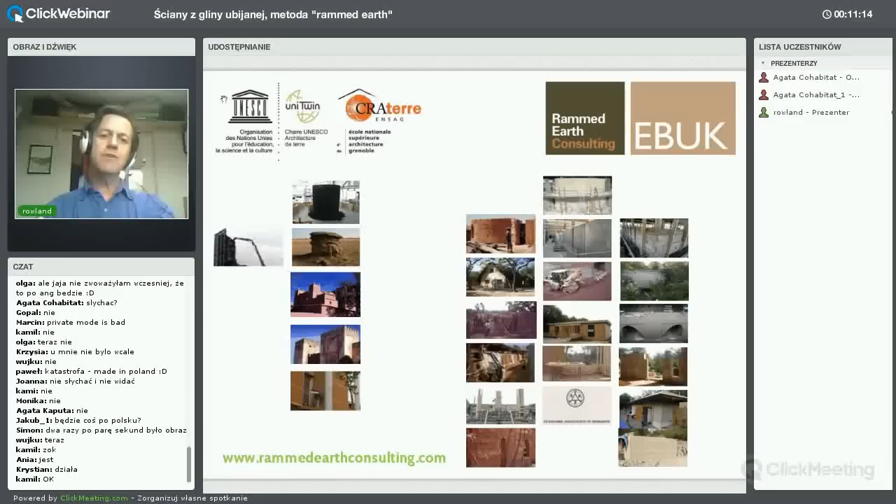Knowledge and no knowledge at the same time. I'm going to just start off with a slide about

What rammed earth is not. We just started with a little film from, I think, America, and they're adding cement to their mix. Adding cement to the mix is something that we just don't do. If you need cement as a binder, then really you should be making concrete and not calling it earth, because it's just a confusion.

I'm just showing this slide because it shows the figures from the UN, which says that every ton of cement which is produced produces 1.25 tons of carbon dioxide. And there's an issue there because,

Well, these little shells are about the size of your red blood corpuscle. Inside that ring of calcium, which is the shell, there was a little piece of carbon, and that piece of carbon was taken out of the atmosphere up to 4, 6, 800 million years ago, and deposited at the bottom of the sea in a very stable form. And the way that we make cement is to burn that piece of carbon out of the shell and put it back into the atmosphere in the form of carbon dioxide.

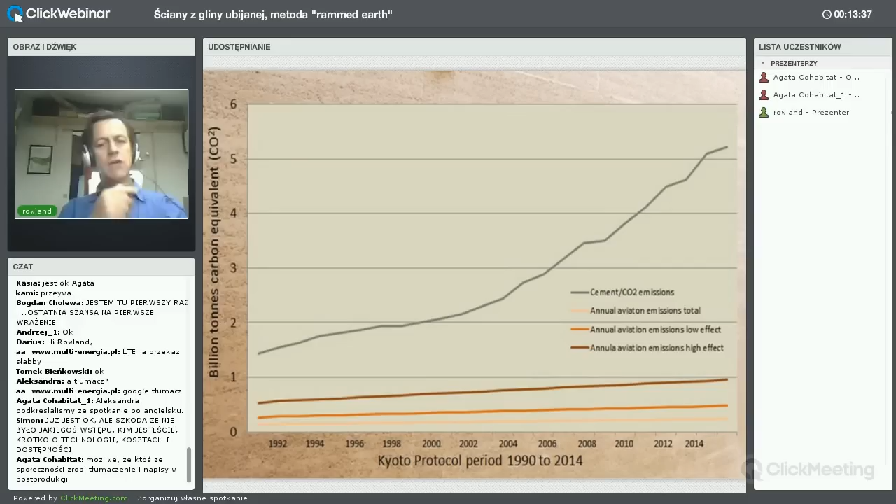We just prepared a little graph about this, which compares the carbon dioxide which is being emitted from aeroplanes with the carbon dioxide which is being emitted from cement over the Kyoto period. So from 1990 up to the latest figures we have, which is 2014. So you've got these three lines at the bottom, which is CO2 emissions from aviation, from aeroplanes over that period, and the grey line above is the CO2 emissions that we have from cement over the same period.

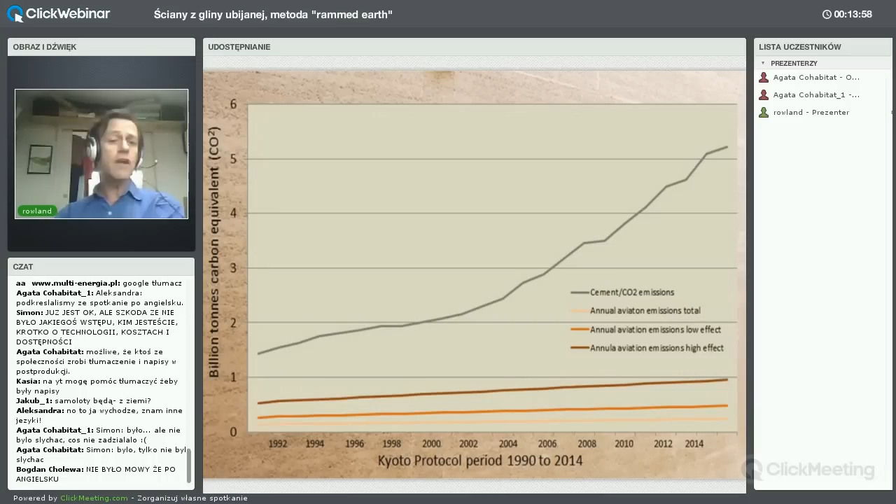And you can see that the emissions from cement are rising very, very fast, and much faster than they are from aviation. So this is one of the reasons that we don't use cement in our mixes, and one of the messages that I'm most keen to promote about this material is that although in America and Australia a lot of people use cement, we do not.

The next slide just kind of emphasizes this point a little bit more, talking about monopolies and why it's not so easy to build with earth in a modern context, and this will be as true in Poland as it is in the UK.

Legislated monopolies, building regulations, standards tend to focus on materials like cement and steel, and they in turn lead to financial monopolies. They will lend you money, will insure your building as long as you follow the building regulations, which is about cement and steel. And then professional monopolies will train you to be an architect or an engineer, but obviously we're going to train you to follow the building regulations, and therefore not earth, but more cement and steel.

And at the bottom you've got research monopolies, where again funding from government and industry tends to be funded in such a way that it supports industries like cement and steel. So you have this situation, and our job is to try and work out how to get around some of these things and move earth to being a more normal type of material.

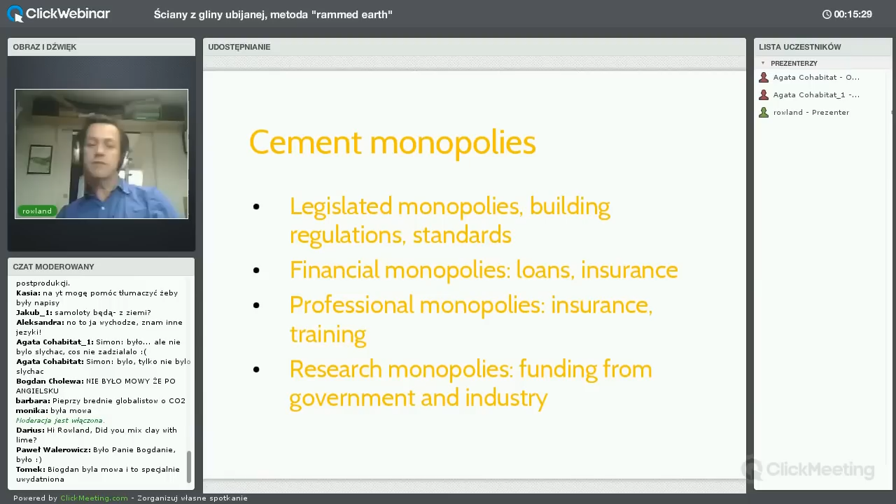Okay, so that's the heavy stuff. And then the next question that quite often comes is why earth? What is, apart from these emission issues, what else can earth offer?

So this is an image of a termite mound in West Africa, and it's in an area where the temperature can go from 40 degrees Celsius in the day to 0 degrees at night. And it's sheltering organisms which are very sensitive to temperature, and they're using only the materials around them which they have to make a stable environment, and the material that they're using is earth.

And with the earth and the way that they're designing, they're able to stabilize their environment to such an extent that they have a very low temperature range inside, which I can illustrate to you a little bit more what the inside of this structure is like. The white areas have been filled with plaster of Paris, so they are air, and they're surrounded by this clay structure.

Within that structure, the termites farm a kind of fungus, and the fungus is extremely sensitive to both temperature and humidity. If the fungus dies, then the termites die, because this is their food source. So they found that using earth is a very effective way of controlling both temperature and humidity in an area where the temperature diverges by 40 degrees in a 24-hour cycle.

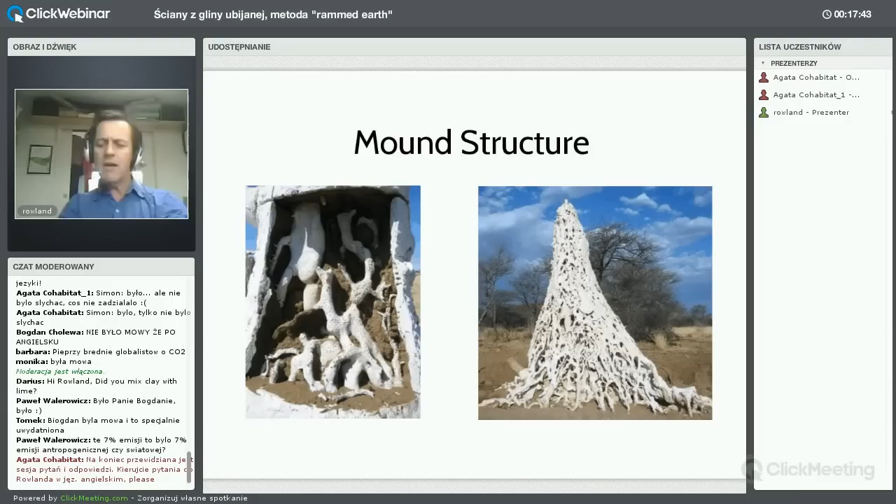So earth has got a lot going for it in terms of how you use it and the kinds of environments you can build with it. Termites have been doing this for 400 million years, and they're extremely advanced. We've been doing it for a few thousand years, and we have a lot to learn. For me, that's part of the excitement of using the material.

Rammed earth is just one of a family of earthen materials. It's one of the denser earth materials, and it's been used around the world, on every continent except Antarctica. There are a whole set of common features to do with the use of the material.

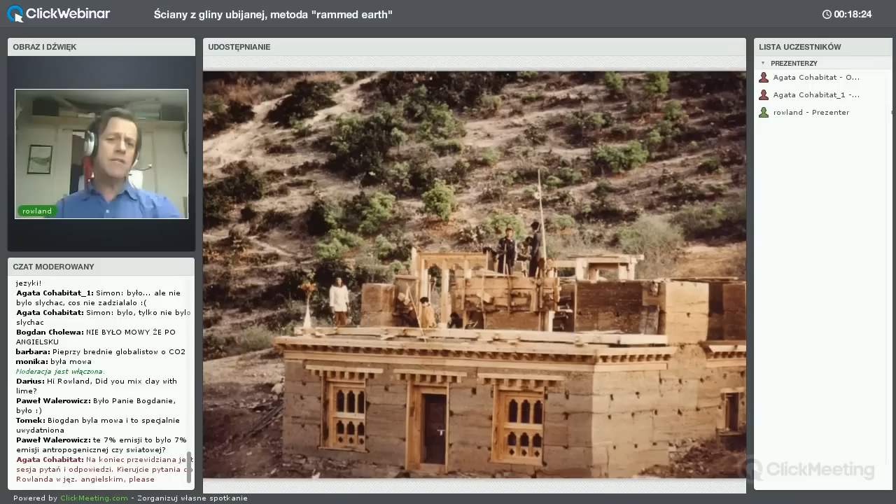Things like not moving material very far. In this case, this is a building in Bhutan where the building is on the side of a mountain, and the material has been dug from where the building stands.

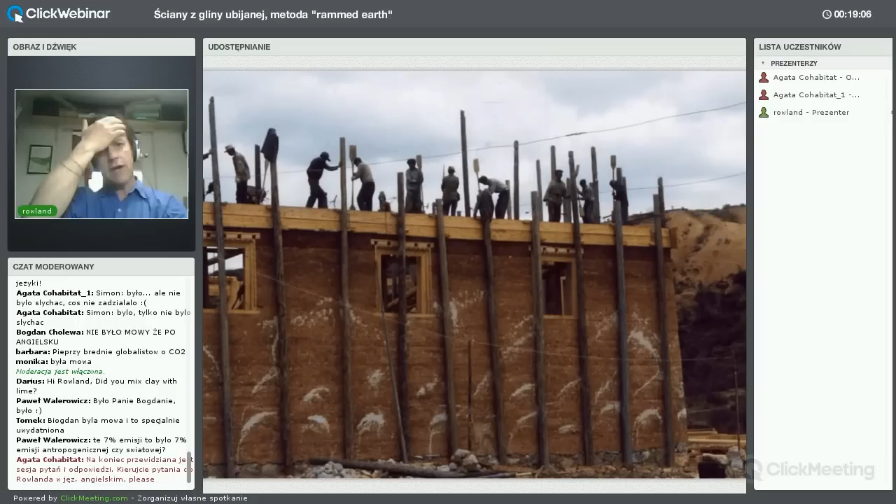We've been in a situation in West Africa where the opposite is true, and women do all the ramming while the men do all the material preparation and placing. It doesn't really matter, as long as the correct conditions for the material are met.

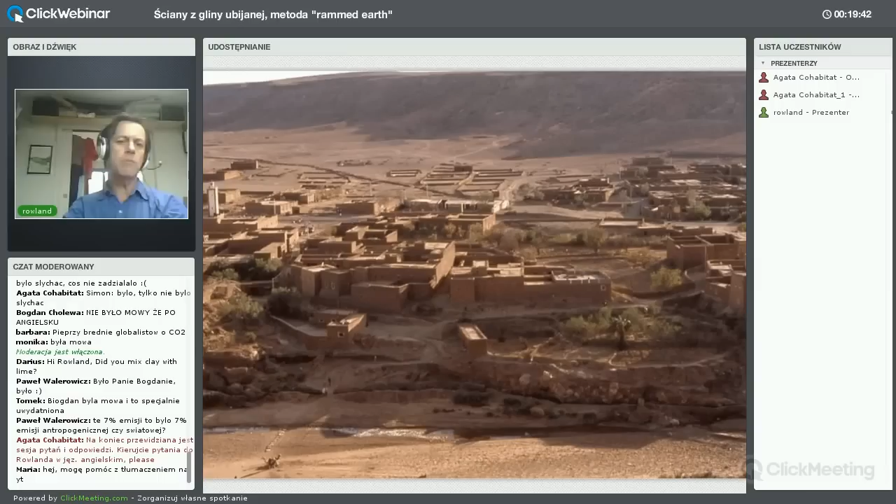This is Morocco, and Morocco has an enormous quantity of rammed earth structures. We're looking in this image to a new town from the site of an old town. The old town has 3 or 4 story buildings, while the new town has 1 or 2 story buildings, respecting the newer building codes.

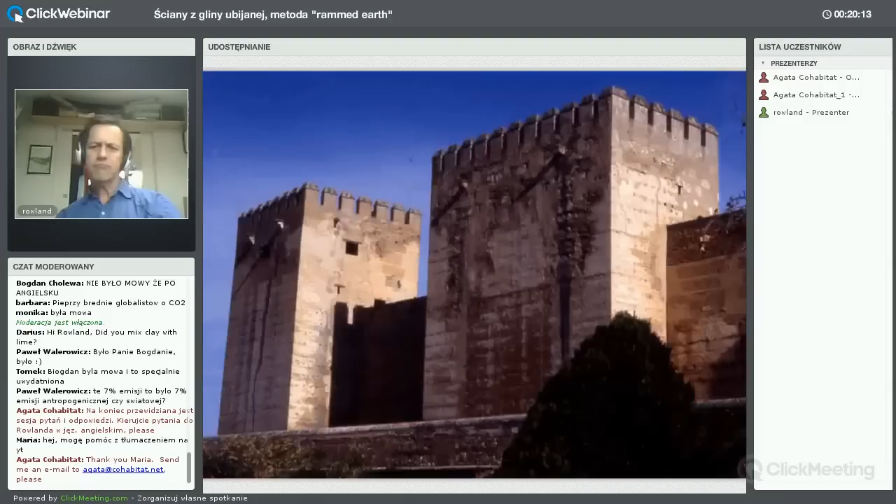Historically, there are a lot of amazing examples. This is in Granada, Spain — the Alhambra. But of course, the Great Wall of China was also very largely rammed earth. Some parts of it have brick or stone facings, which is an aspect of building with rammed earth that has been used many times across the centuries and in different places — that it can be plastered or finished in lots of different ways.

It goes through different fashions. People want to see the earth and think it's modern and interesting, or they don't want to see the earth because it's old-fashioned and poor. Really, throughout all of these things — whether it's rammed by men or women, in China or Peru, covered or not covered — the same aspects of the earth remain: if you do it correctly, you can do all of these things.

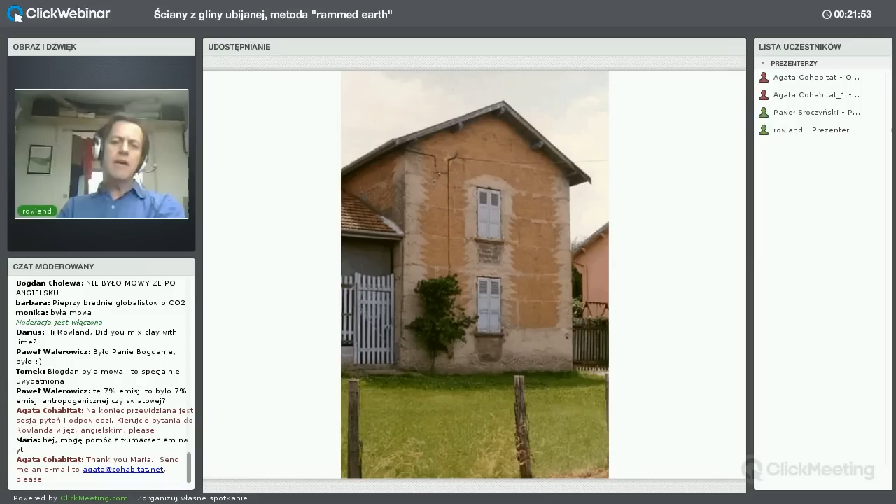There's a big history of earth building, obviously, wherever humans have been. Typically, humans live where there is soil, and soil can be used in lots of different ways. This is central France.

I don't have images from Poland, but I know of interesting work done by a woman called Marta Zurakowska, who was studying in Scotland. She gave a paper about earth building after the Second World War, which was supported by the Polish government and universities, but fell out of favor in the 1960s. She says Polish building standards from the 1960s contain all the essential information about earth walls, plasters, and mortars, but they're now forgotten. I guess if you dig a little in Poland, you'll find more of this kind of information.

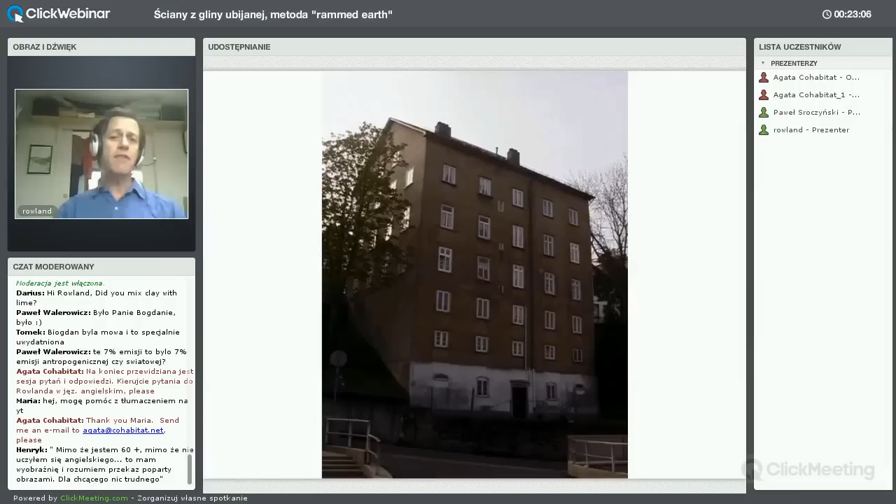One question we're very often asked: how high can you go? This is a German example from the former East Germany, built in 1820. It's 7 stories, built from material dug out of the basement to form a cellar. It's not very attractive or beautiful - one feels architects today could make something more interesting to look at - but nevertheless it's been there for coming up on 200 years, and it answers this question about how high you can go.

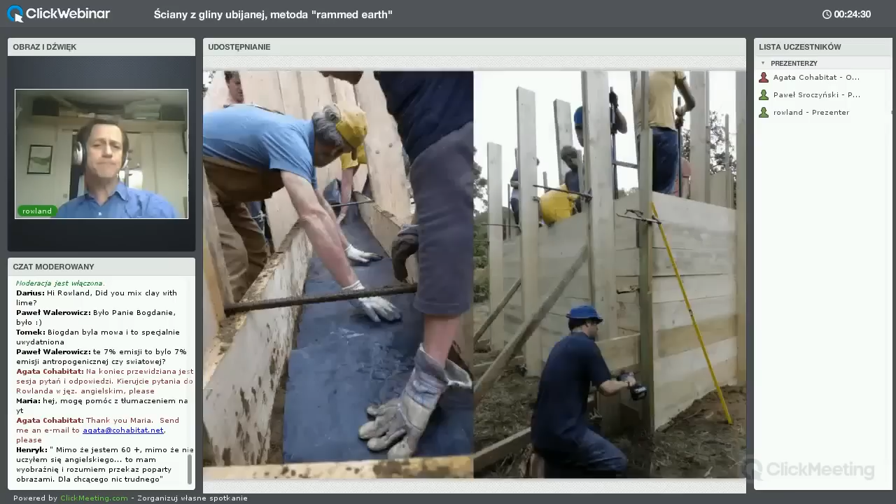So, rammed earth. I'm going to move around different projects and talk about different aspects, but just quickly to say there is no one answer to what formwork and what material you can use. It's quite widely applicable.

This particular project is a workshop, and we're using formwork made from old scaffold planks, fixed together and bolted through quite simply, using a mix of material.

This is very basic formwork using scaffold planks to make a structure about 5 meters long and 2.5 meters high, and we rammed this all by hand in about a day and a half with a group of architects.

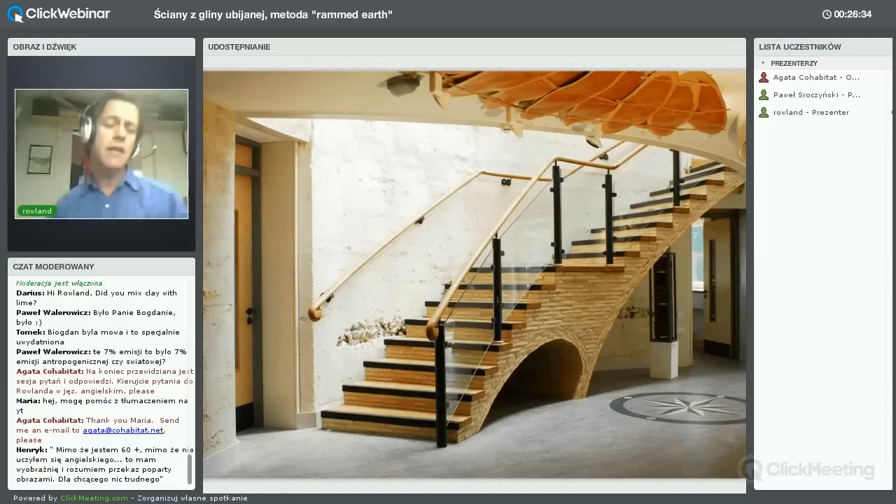Now we come to the heart of the material. First you have the box, the formwork, in this case a concrete formwork hired from the concrete industry. On the inside face, it's more of a smooth curve, and on the outside face, a series of flat faces which will have insulation put against them to meet modern building regulations.

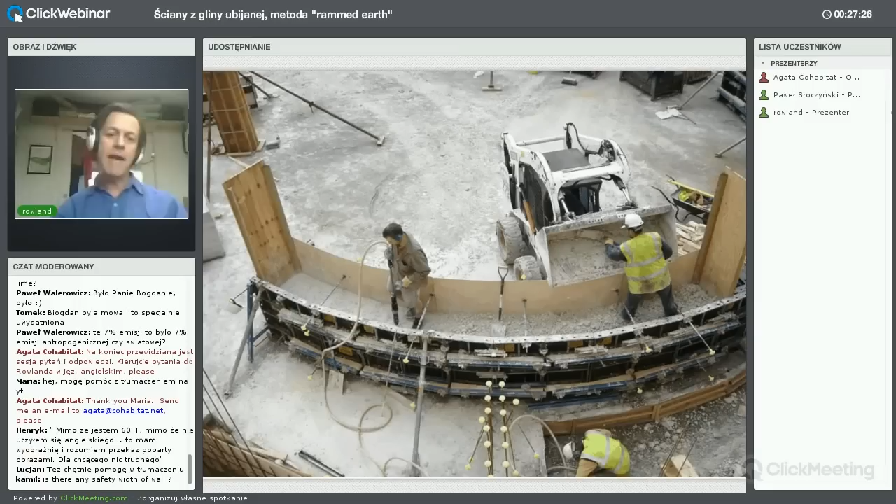Behind you can see a white earth material, that's chalk, and it's been moved from the hole that the building sits into, out of the hole, and then back into the hole again to form walls. Here you can see a front end loader, and Miguel is taking material out of the bucket and putting it against the face of the formwork, and then the rest is tipped in. On the left you can see Ben with a pneumatic tool ramming. In this job we had 5 of us working - 2 carpenters, because the curved formwork is a bit more complicated to assemble, and then 3 people running the digger and the rammer and filling.

Other things to say about this image: you can see curves being produced which are simple curves, and also complex curves in the middle there. So it's really a question of understanding the geometry of what you're trying to build and understanding the formwork that you're trying to build with. Here we're actually using commercial concrete formwork, and we're making it do something that it wasn't necessarily designed to do, but in fact it does very well.

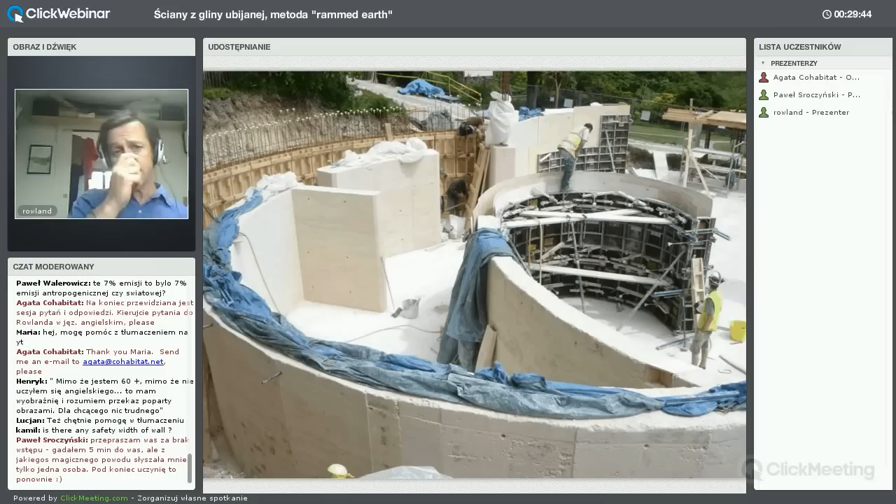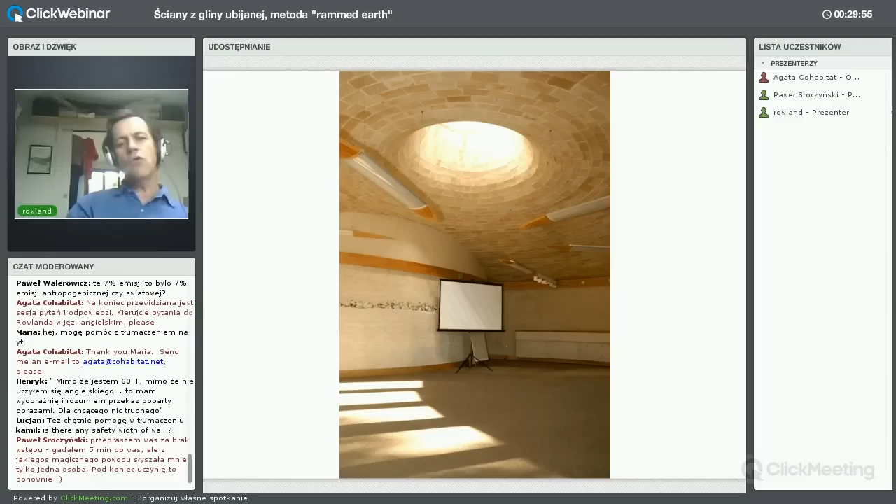Rammed earth is... you can see that in this case it's holding not only its own weight, which is considerable, about 1.7 tons to the cubic meter in the case of chalk, but it's also holding big masonry domes, and they've got earth green roofs on top of that.

Something slightly different: this is a classroom in the southeast of England, and this is a classroom built to passive house standard, passive house being an energy code. It started out as being really about insulation material and controlling the temperature inside a building through insulation. But more recently, people have started to work with mass. So on the outside, you can see wood timber cladding, and on the inside, you can see rammed earth.

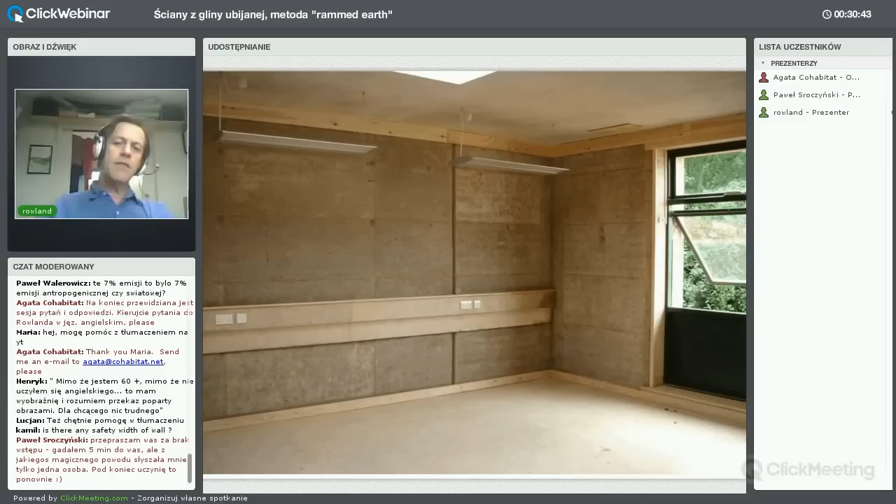And the line where the window meets the wall, you can see that there's a lot of insulation material on the outside and the mass of the wall internally. This is something relatively new for passive house, combining mass with insulation.

So any heat that's captured in the building through sunlight coming through the windows... this is a classroom, so there'll be 30 people inside, and they're hot, and they might be using computers, and they're hot. Instead of the air temperature rising, the wall temperature rises. And when they go home at the end of the day and the sun goes down, the temperature that's locked in the wall then comes out.

In fact, this is a funny building because it's one of a group of buildings that share the same heat source, and what they understood was that they should have put a control switch to that building to be able to turn off the heat coming into it, because if you have a radiator running for more than a day a week, the whole building overheats. So they actually have to turn off the heating on Monday evening and leave it off for the rest of the week.

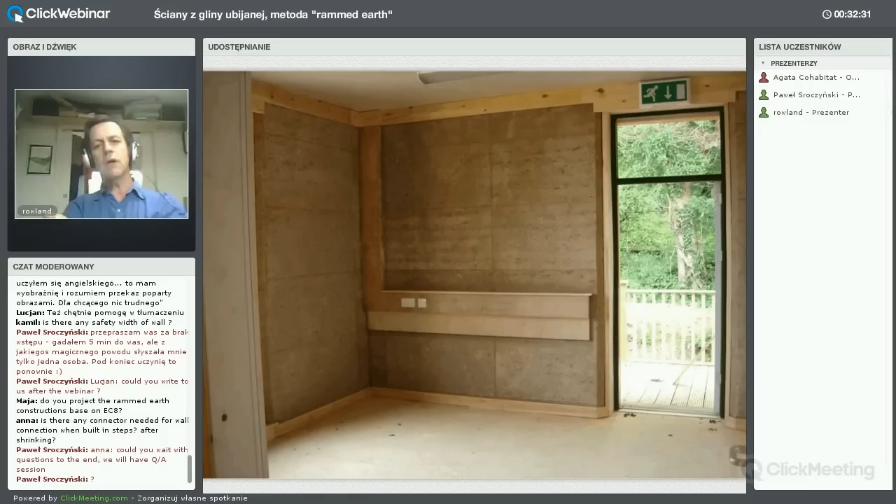This is local authority work, built by an education department of a local authority, and we have very little control over them as a client. But the people using these buildings were so happy that they went back and said, if you have more buildings to build in the area, you should do it like this, because more buildings like this would allow us to employ more teachers and pay less for heating. So the local authority built a whole load more of these, and this is an example of the later build.

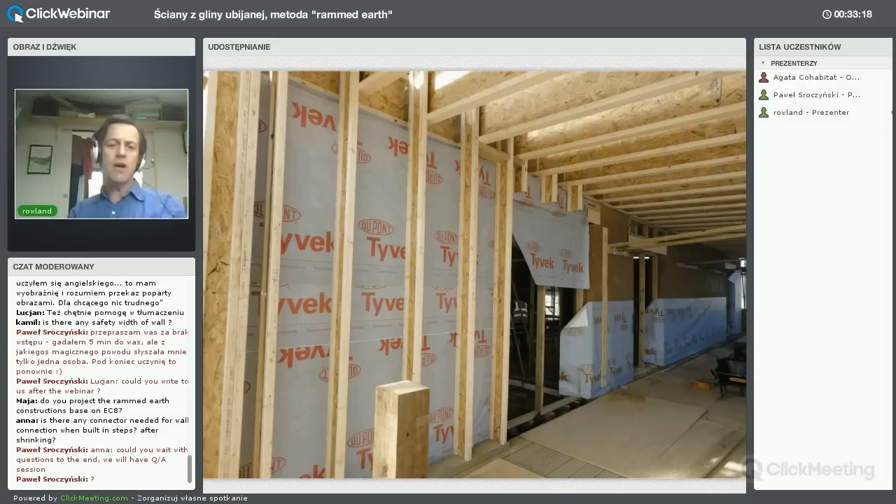So you've got the rammed earth walls with timber frame on the outside, which holds the timber paneling and also the insulation that will sit against it. Because the walls are inside, they're the load-bearing element. They're holding up the roof, they're holding the insulation on the wall, and there's no cold bridge. There's no problem with heat escaping through elements which are not insulated, because the insulation's on the outside.

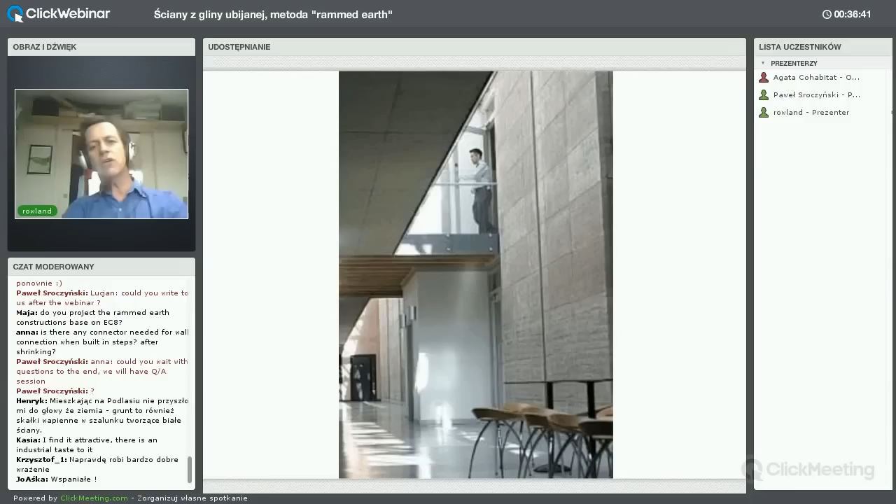So it's a situation I prefer, public buildings—also because, in this case, it's a commercial office development. People go and work there every day. They don't have to buy it, they just experience it, and they find it's quite an enjoyable building to work in, and later maybe they'll think we could build a house like this. So it's a kind of marketing strategy, if you like, to think about public buildings rather than private residential.

Having said that, if somebody were to offer me the opportunity to build 50 houses or 100 housing units, that would be immediately very interesting.

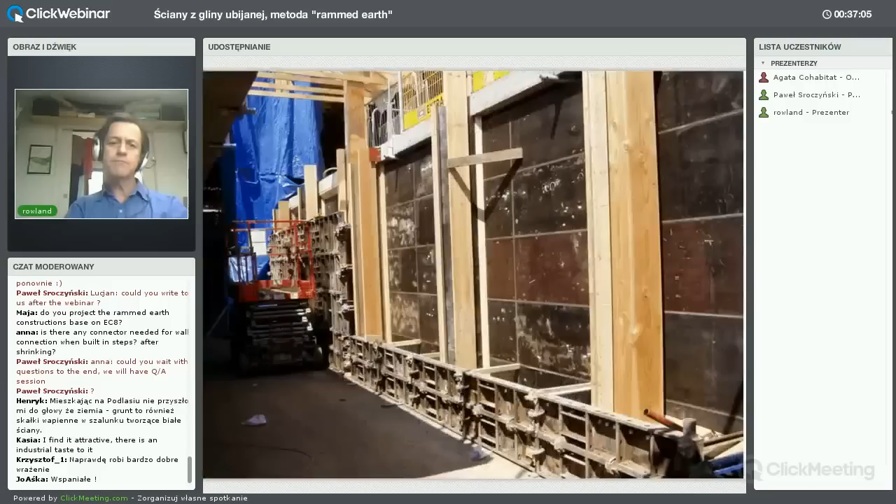So we're back to the same commercial concrete formwork. It's hired from a company, delivered on site, and it's quite expensive—you have to immediately begin using it. You have to be very clear about how you're going to use this material, because as long as it stays on site, you have to pay for it.

On the back wall, you can see they've made a full wall of panels, a safety element so someone can't fall out the back. At the front, the formwork is built up in layers of 600 millimeters in height at a time. They're filled with approximately 6 layers of loose material, and then the next layer is put on.

Most of our work uses material found on site. In this case, this office development's site had sand, so we had to bring in clay—10% clay and 30% stones and gravel, added to the sand found on site. This mixer was used to mix the material and put it into bags for storage until required.

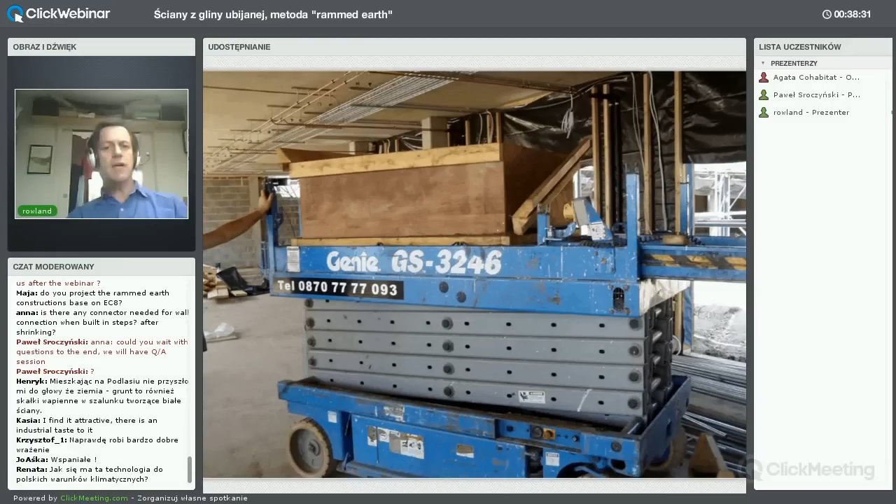We're using a commercial scissor lift with a box built on top to deliver the material up to the 6 meter or so height. There you can see the loose, moist material being shoveled into the form, then compacted in 100 millimeter layers, and the next layer of formwork is put on.

This office building is a funny story because it was built by a developer working for a local authority. They took 80% of the building for their own use, and after 7 years, following the financial crash of 2008, the local authority couldn't afford to stay there, leaving the developer faced with a building that was going to be empty and a cost to them.

But within 6 months, they had completely refilled it. This is in an area with a lot of concrete, steel and glass office buildings standing empty because of economic problems, but this particular building didn't have those problems because it is so different—it's comfortable, it's attractive. The developer realized they needed to build more buildings like this and fewer in steel and concrete, of which there are plenty, and which people don't particularly like.

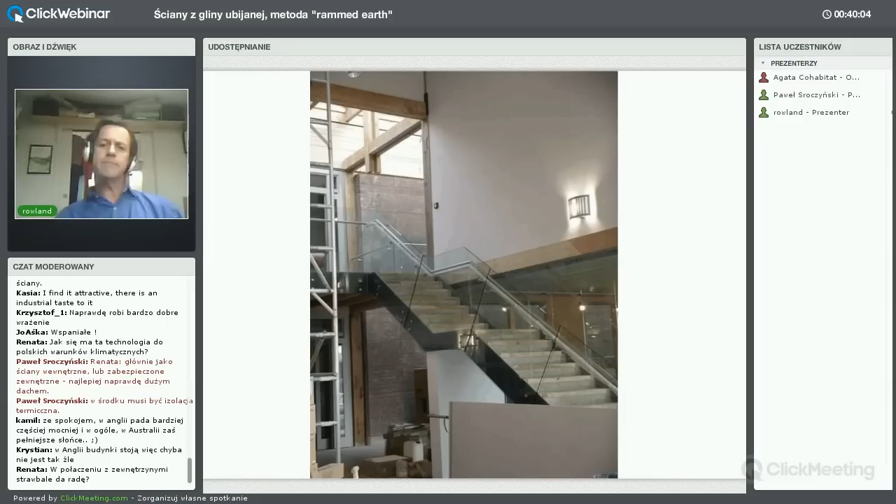So that's the sort of the building side of things—some of the work and projects I've been doing, a bit of thinking about how to introduce a material like rammed earth into a modern construction scenario.

There's also another whole context, which is about rules and regulations. I talked about this at the beginning in terms of monopolies and cement, and we've been dealing with this since we first started building in Africa.

We worked together over a number of years and produced this code of practice, which is highly illustrated and very much aimed at owner builders, smaller builders, and builders who don't necessarily read. The code is split into illustrated and written sections, and it became the basis of the Zimbabwe Standard Code of Practice for rammed earth structures.

This standard happened because we sat in committee meetings for a couple of years, every month—it's a voluntary system, so you just go, you don't get paid, and you go through the document line by line. Eventually it's published as a national standard. This was published in 2001, and it allows people to build with a degree of security, knowing these are tested limits they can work to.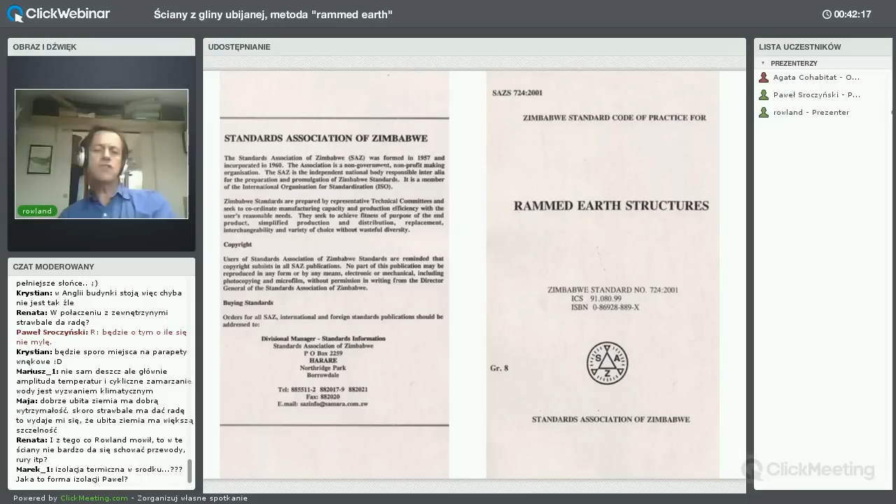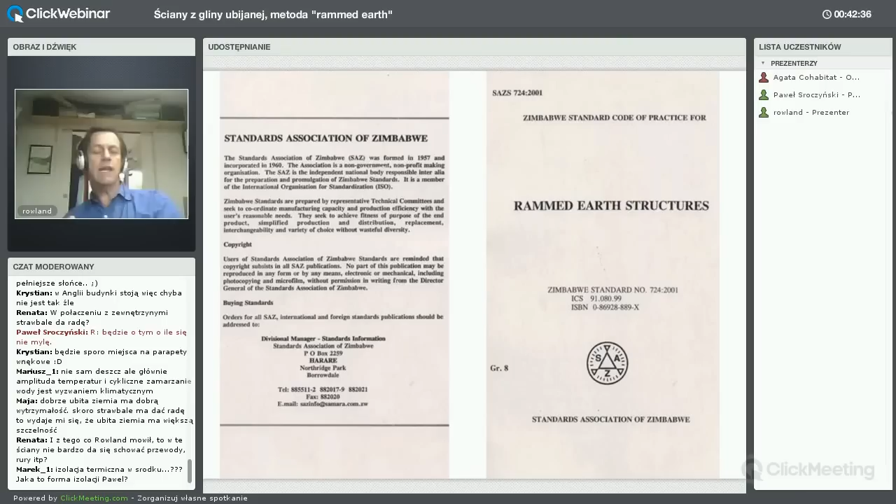This also applies to schools, because schools are typically funded by the government and follow city rules even if they're building in very remote rural areas. You'll see more of this later, but this is why we did the standard—to allow things like schools and clinics to be built in urban or outside urban areas.

So we were asked to try to harmonize the Zimbabwe code on earth buildings across the group of 15. That took quite a long time, but it was very interesting work, because I realized how much further behind Europe was falling in terms of regulation on this kind of thing compared to Africa.

The Rammed Earth Code of Practice was harmonized across the 15 countries in 2012, and we're now working on an all-Africa version.

Around the same time, we were asked to peer review an American standard, an ASTM, the Standard Guide for Design of Earth Wall Building Systems. It's a very interesting, very general document, and for places like Serbia, where you're not allowed to build new earth buildings, it could be a good way to start, because it generally says if you have an existing earth building, you can build to that same standard in a safe manner—that's a big leap forward.

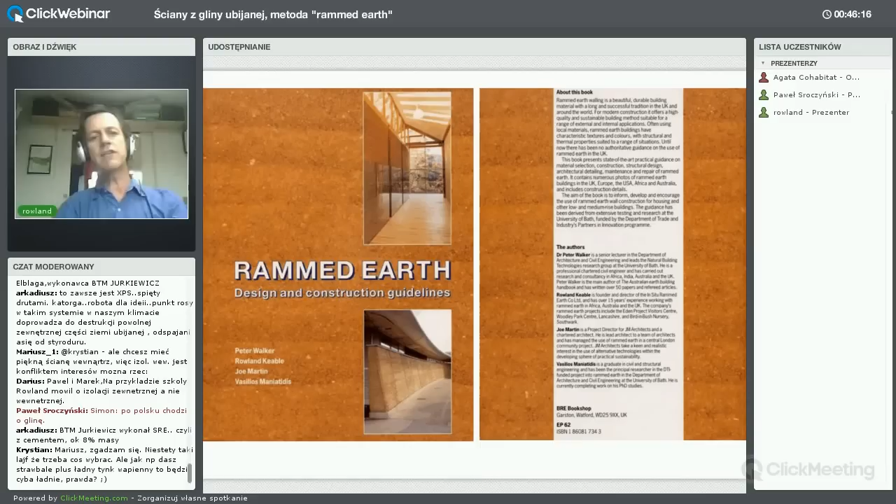This guideline is more UK based than the code of practice I showed you. It talks about insulation and issues that prevail in Northern Europe, as opposed to the code of practice, which looks much more at Africa. Over its lifetime, I think it was published in 2004, it has grown its own influence.

It's the basis of the BREEAM guide for rammed earth structures, energy rating for rammed earth structures and rammed chalk structures, all of which have an A+ rating. Now people say BREEAM is or isn't accurate or rigorous, but the main thing for me is that rammed earth should be on a list of building materials, and cob, adobe and other earth technologies should be on those lists, and that's why we've worked to put it there.

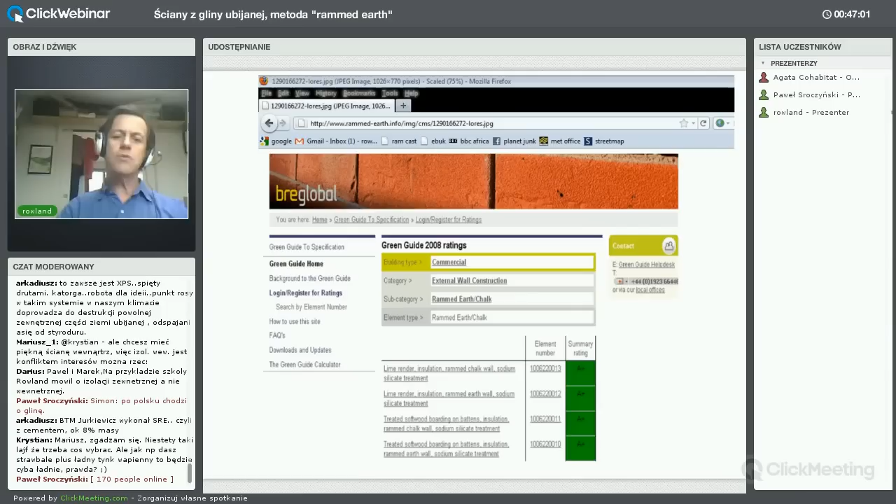At the same time, it's gone into something called the National Building Specification, an online tool for architects registered with the Royal Institute of British Architects. There are sections on everything from roofing materials to foundation materials, everything to do with buildings, and they also have a specification for rammed earth. Again, it's not a national standard, but it begins to change the framework within which people work.

Recently we were on a site and the architect instructed the contractor, according to the National Building Specification, you have to put some money to one side for testing of materials. That's normally my line - that's normally what I have to instruct the architect and the contractor. But once it's in the National Building Specification, the architect begins to instruct the contractor on these things, and that makes the whole thing much easier to work with.

We also set up Earth Building UK. There are a lot of bodies in the UK to do with sustainable construction of one sort or another, but we decided we needed our own earth building group because it's sufficiently different from people trying to sell ground source heat pumps or other organizations that we're happy to cooperate with. In fact, we'd very much like there to be a straw bale organization in the UK, but at the moment there isn't one. Once there is one, you find it's much easier to talk to organizations, to state structures, and bring your point across.

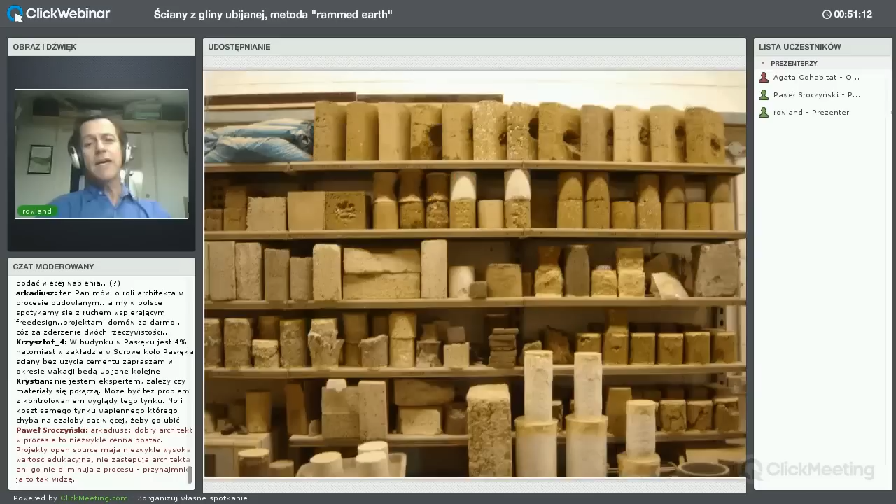Behind all of this, there is research work going on. These are samples in a lab that we prepared in the making of the guideline, and you can see samples which have been broken, eroded, crushed, or damaged in various different ways to tell us more about the strength of these materials and how the strength of samples relates to the strength of whole walls.

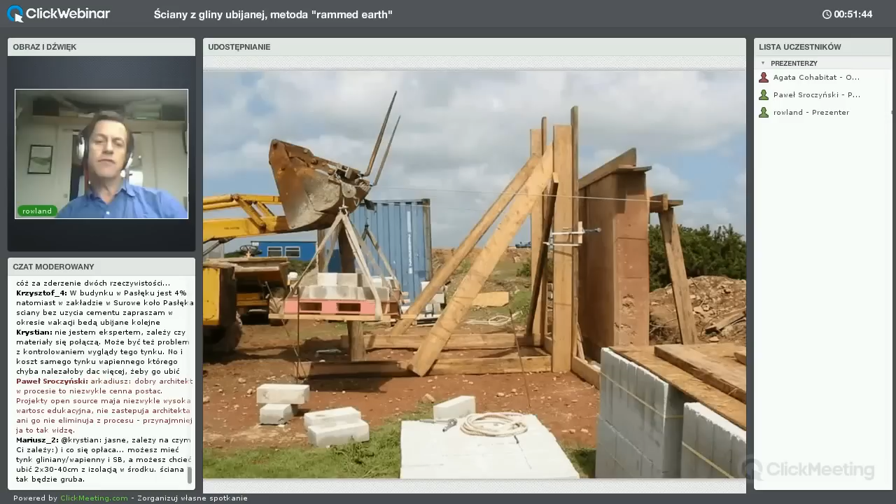Quite often you have to do these sorts of things on site, in situ, because the material you're using is not a British standard material. In this case, it was dug up on site. It wasn't a particularly strong material, it didn't have very strong strength characteristics, and it was quite easy to abrade. But it did have very good lateral strength, and that was the thing most concerning to the engineer.

This is a more typical full-scale test going on in a lab, where the newly formed column on the left is 2.8 meters, took 45 minutes to produce, and you can see it's a darker color because it's still wet. On the right-hand side it's a paler color because it's dried, and it's failing at a little over 10 tons of load. I normally say to people that's like a London bus put onto a 350 millimeter square column of clay, sand and gravel, which has been put into formwork and compacted to its optimum density.

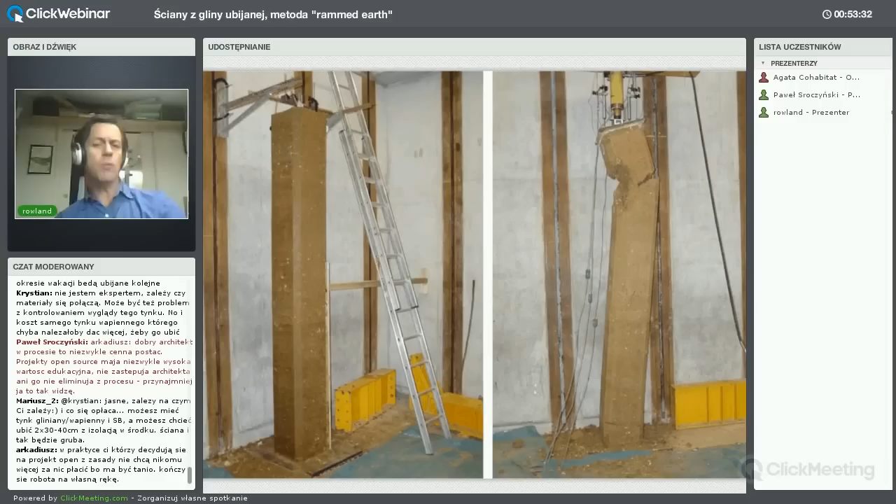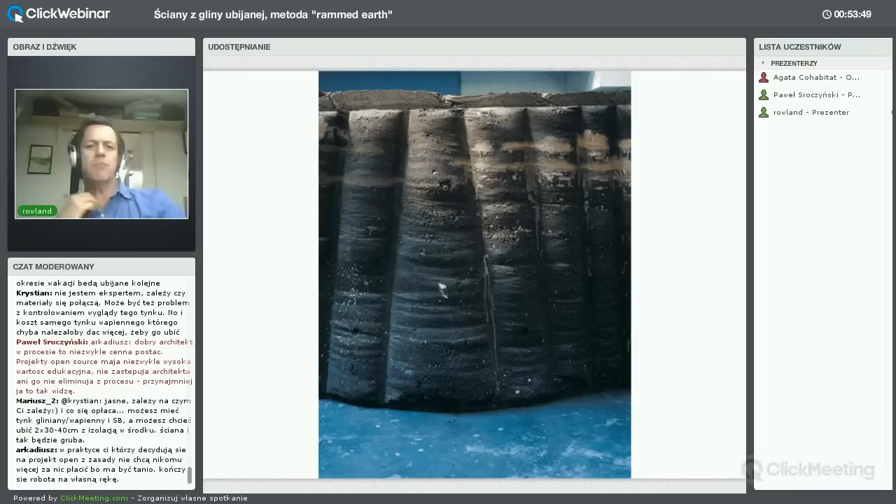Rammed earth is about formwork. It's about the shapes that you can make, and in this case, the shapes we're making are fabric. Nobody's used this for a project yet, but they're quite fun things to play around with. It's one of the reasons I continue to be interested in rammed earth - people are continually proposing different things to do with it, and each time we try something, we find that it can do things.

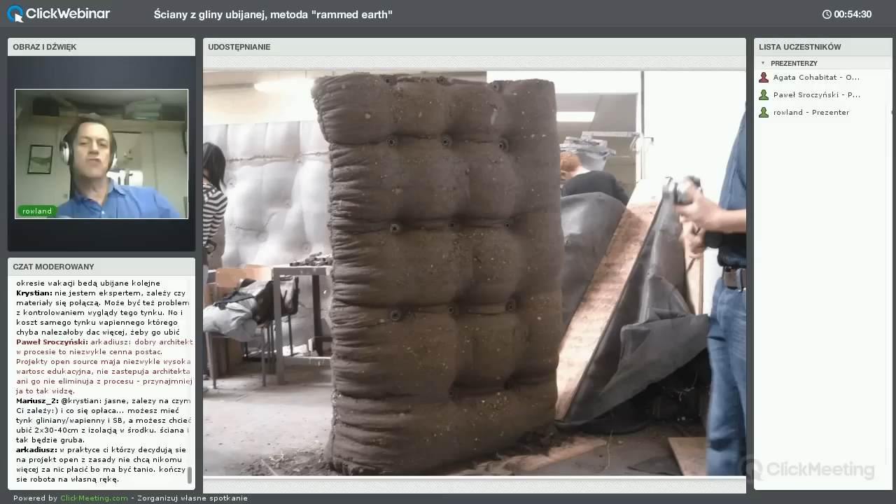This is a column. And this is back to a straight wall, which looks like this when you take the fabric off. We haven't really thought of an application except that we've built 2.5 tons of wall with about 10 kilos of fabric. There's something quite interesting about that, but more work is needed.

So then this is a lecture theatre we built in Wales, and it comes back to various points I've been speaking about in terms of the office development and so on, where the architect, the engineer, the contractor - none of them are specialists. So my job is to help them understand what is necessary to build these structures. I'm not an engineer, I'm not an architect, I'm not a surveyor, I'm not a contractor - I'm a consultant now. It's really about helping them understand what these materials can do.

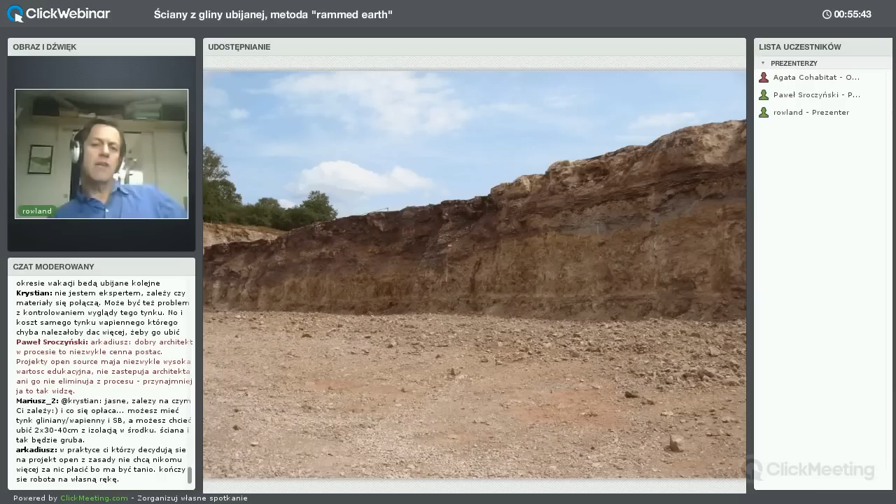This is a lecture theatre at the Centre for Alternative Technology in Wales, and the walls are a little over 7 meters high. They come, in this case, from a quarry. This material is limestone, and the dark lines in it are clay. It's a valueless material until the clay is washed away, because the concrete industry and the roads industry, tarmac, will not accept limestone with even 1% of clay. That's an opportunity for us, because all of this material has clay in it, and we have to test the proportions, but all we basically pay for is the transport of that material to site.

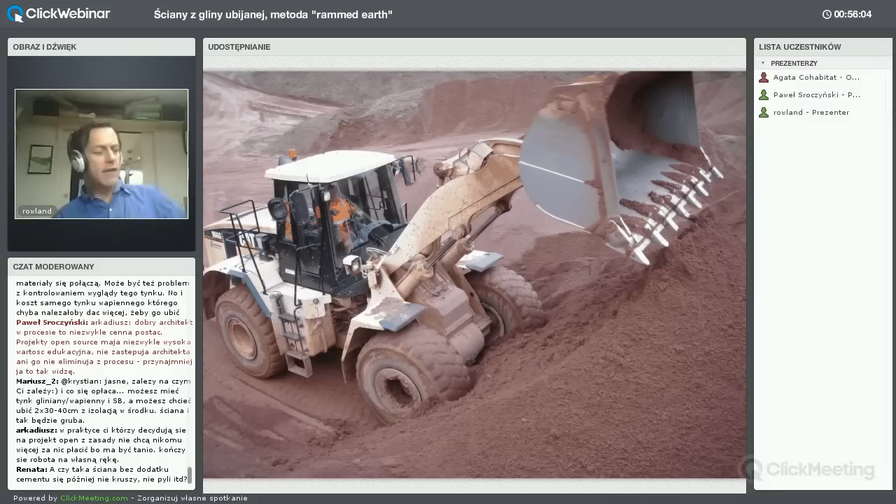I would normally prefer to work with material that is on site, but in this case, the architect insisted on this particular material, this particular color from this particular quarry, and it was something that, again, we didn't have control over.

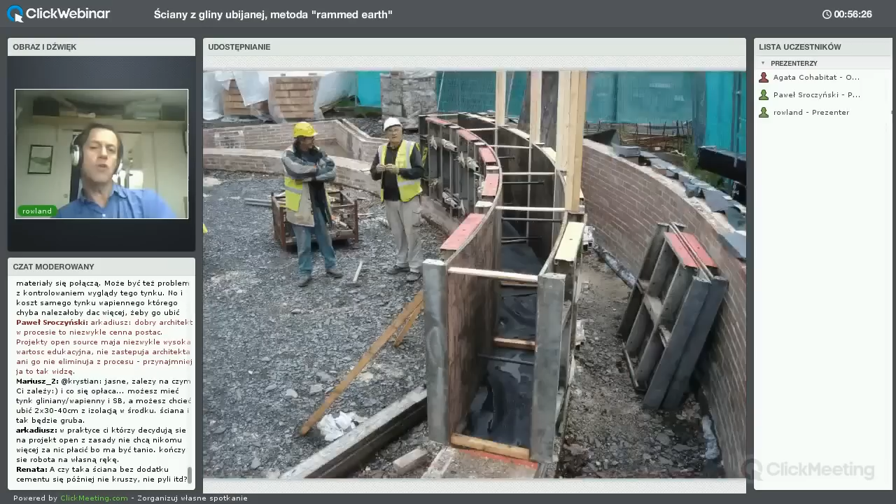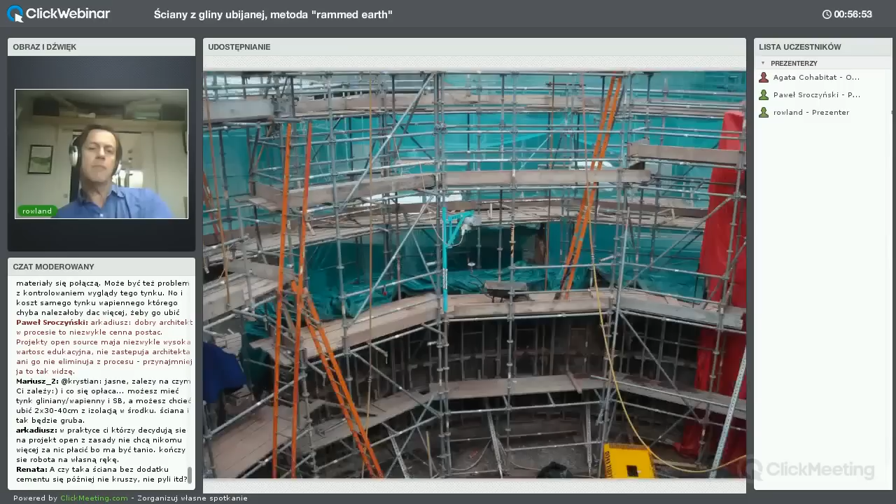But we could say what the formwork was like, and we could instruct the carpenters you can see here in the image, who are basically site carpenters. They put formwork together normally for concrete works, and we're showing them just those little differences between putting formwork together for concrete and for rammed earth. I worked with them for a day and a half, and they completed the project, which has all the normal health and safety issues and access issues that you would expect here.

And it's producing a public building, a load-bearing public building. It's holding the roof, and it's a very high specification energy building, meaning that it doesn't get a lot of heating, but collects as much solar energy as it can, and the energy from people inside the building.

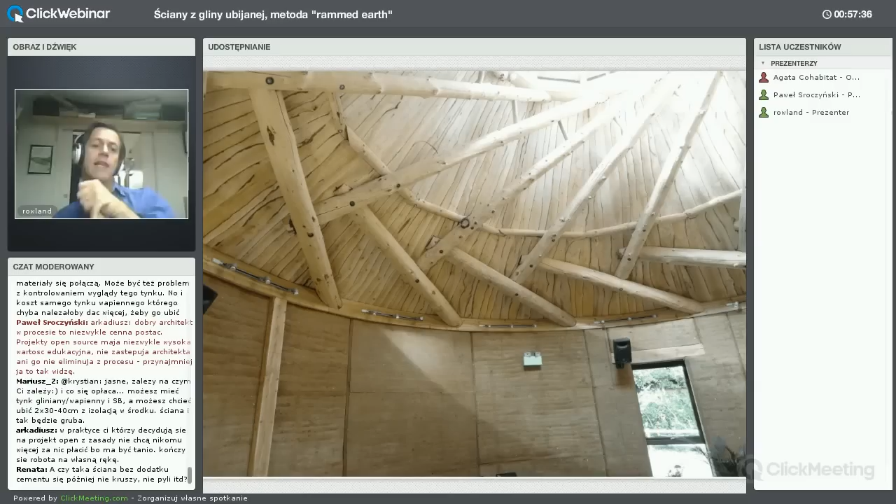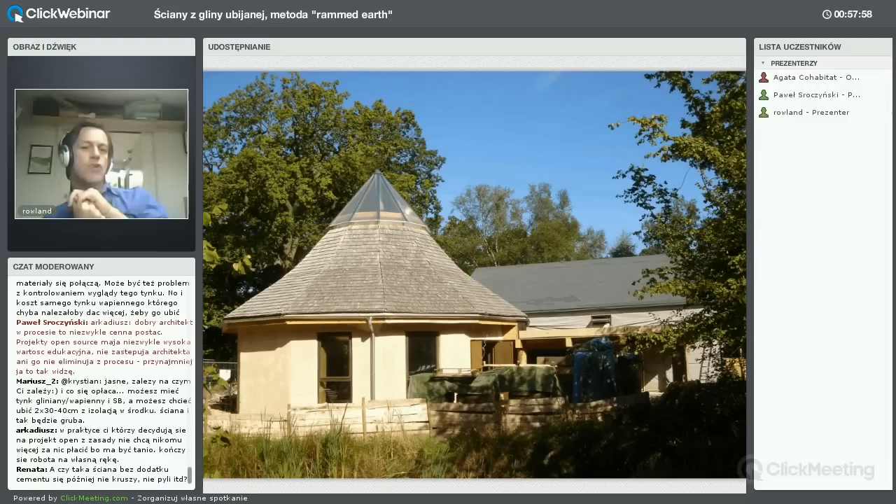A much smaller project, working with children, with boys mainly, who are failing in school, with this big double reciprocating timber roof. It was built in a wood. This is the opening of the building. Just at the front of the shot here, we're looking over a pond, and the pond is where the soil came from, and the trees are where the roof came from. So this building is really very short distance indeed.

Normally, in a building site situation, the use of the pneumatic tool is shared among workers. In this case, the workers are boys between 16 and 19, and they really wanted to use that tool, and they'd almost fight each other to get their hands on it. It's kind of an unusual situation.

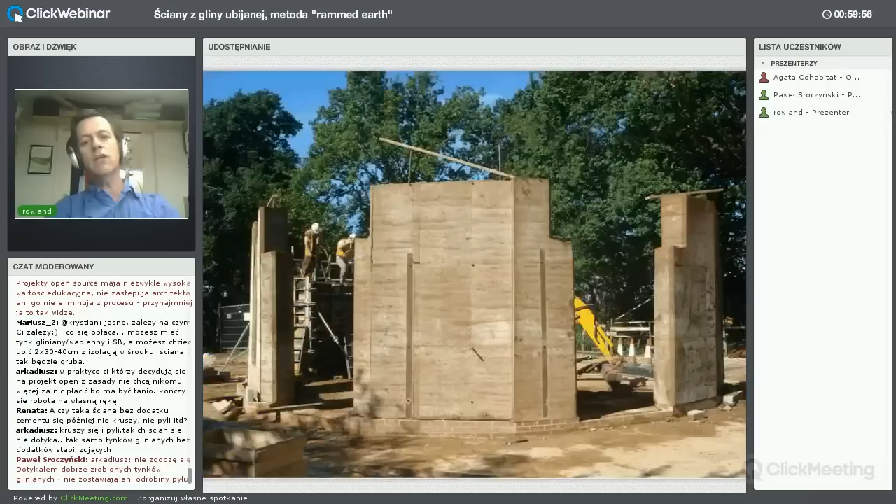So here are our freestanding sections, and they will have—I'm sorry, I'm going to go back—they will have lintels placed across the openings and walls built over the top, and the roof is then placed on top of that. When they came to placing the roof...

I said that I'd like to be there to fit the timber plate that the roof sits on. It's fixed down on bolts which you can see poking up from the top of the wall. And so I was there for a day fixing that plate. And then the client took me back to the station.

And as we went, he said that he was concerned that these walls wouldn't be able to take the load of the roof. And this is a very common perception, that earth walls can't take load. This is a circular building inside, and on the outside it has 12 flat faces. Each of those 12 faces is 6 tons. We did a little calculation to show that the whole roof was 6 tons.

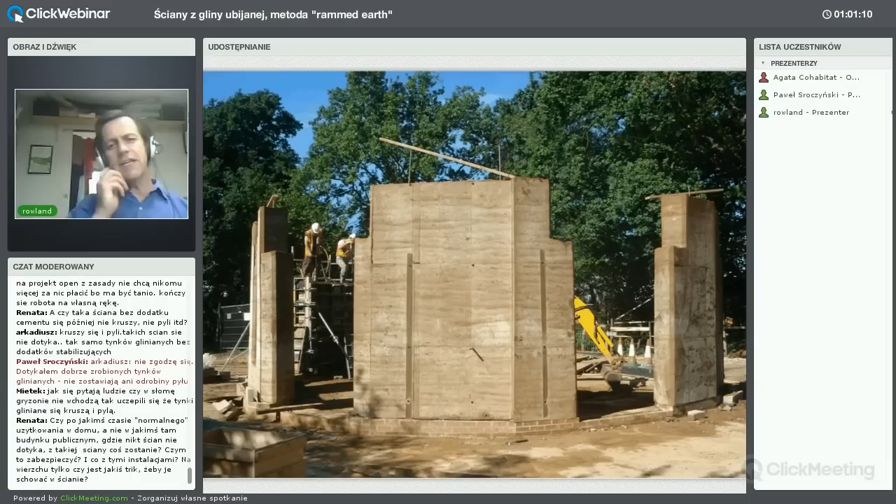So effectively, it's like building another 12th in height onto each of these wall sections. Not a lot of load really at all. But people have this perception that roofs are going to be heavier than they actually are. That's one end of things.

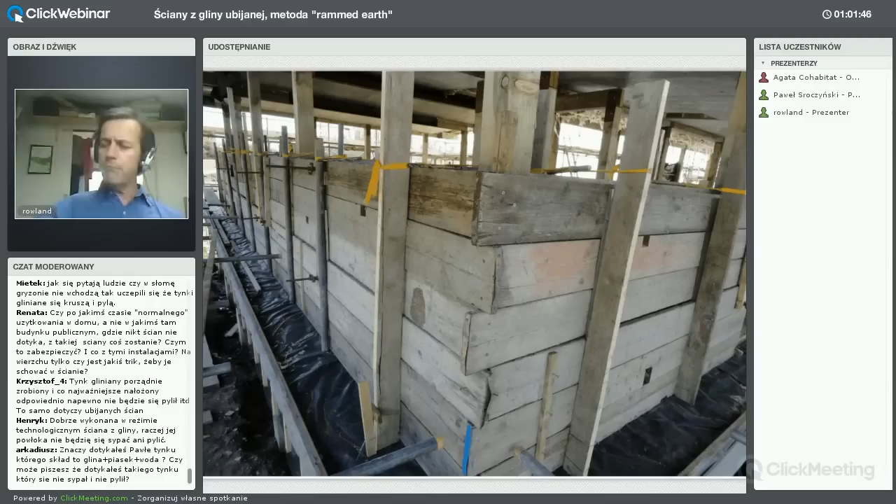Then another end of things is a site in the southeast of England where the client wanted to build the building themselves with volunteer labour. And volunteer labour is something that's been used quite a lot in things like straw bale. People have built a business model on that way of building, but it's more difficult with rammed earth for various reasons. It's really hard work apart from anything else.

And so I said, how many volunteers do you have? And they said, we don't really know, because that's the nature of volunteers. We don't really know, but we think between 2 and 30. And so in this case, we had to buy a lot of second-hand scaffold planks again, and these cost about £300.

We could make a formwork that was 20 meters long, so that if 30 people arrived, they would be fully employed. And if 2 people arrived, they hadn't spent all of their money on hiring expensive formwork. So these are the kinds of things you have to think about.

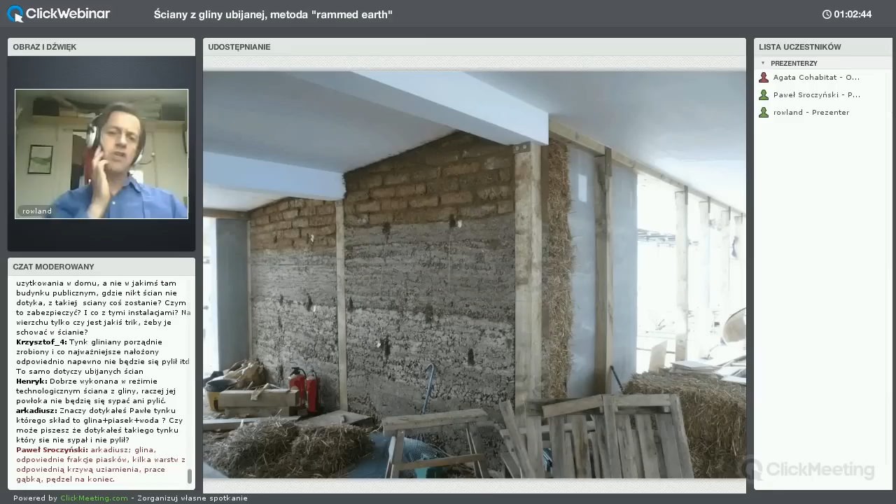This is the same building, and you can see it's got rammed earth. They had a roof in place that we're building under, so the gap between the top of the wall and the roof was filled with adobe bricks they had made, and the outside is insulated with straw bale. A very nice combination of materials.

That's the building facing south, with a lot of thermal mass internally, a lot of insulation externally, and big south-facing triple glazed windows to capture as much heat as possible. Now, I realize I've got about 10 minutes left, so I'm going to go a little bit faster.

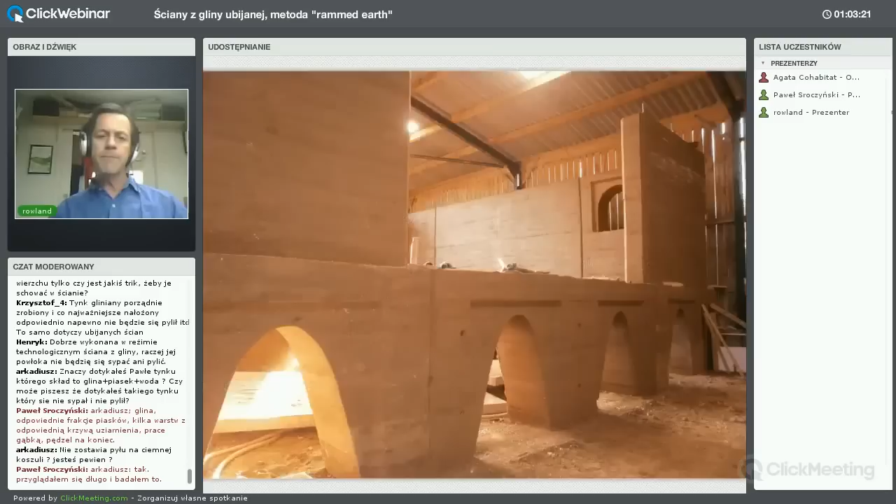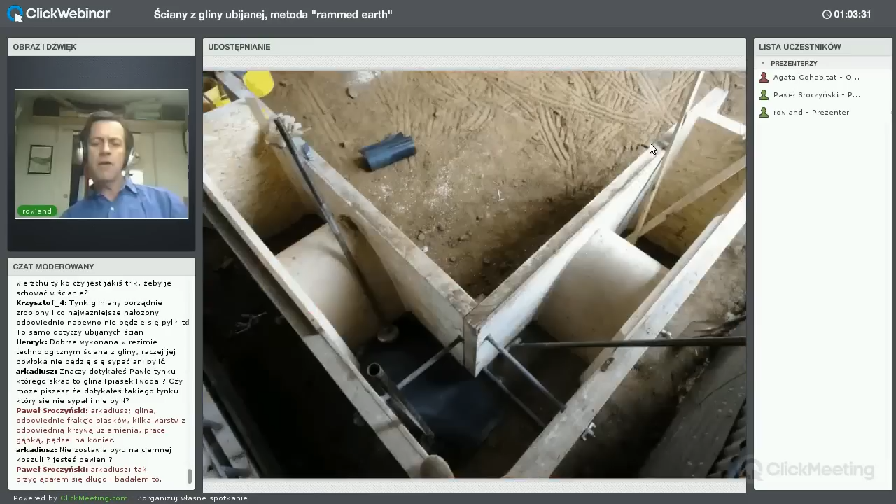Earth is about what you can cast, about the shapes that you can make. This is a building that was built inside a barn, and the formwork, again, is very simple.

Formwork made from sheets of plywood and a frame. The client here had used these 10 years previously on another building project and kept hold of them, then used them again. But this time we were making thicker walls because this is a plinth that a building stands on.

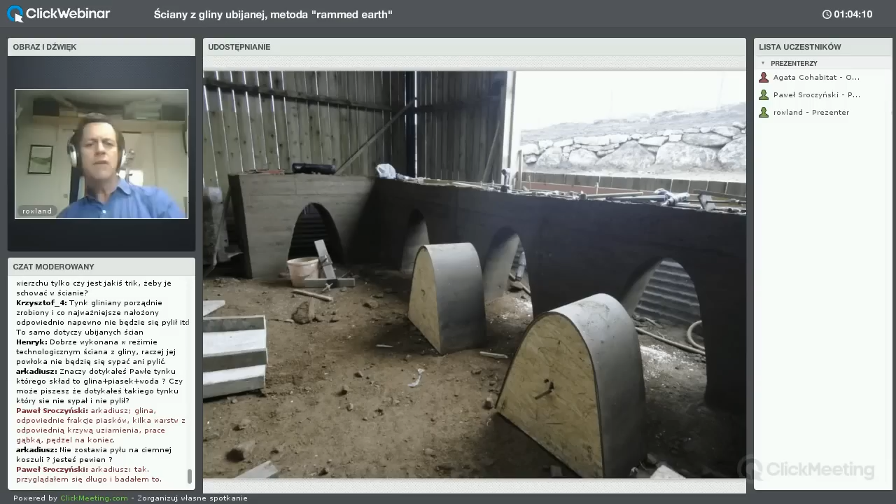We're putting in a very simple block out to make arches. These simple shapes can make repeated arches, and the more arches you make, the less earth you have to ram. So you can see that plinth is about the level of the ground outside, and the thinner walls are built on top of that.

You can see there, and there's a little ledge around the edge which the timber floor will sit on, about 1.2 meters above the level of the barn floor.

Just quickly then, a section on Africa. You can see we're working at one level with contractors, with a lot of equipment, with diggers, with all of the materials at their fingertips. We're also working with people who want to work with volunteers, people who own a building.

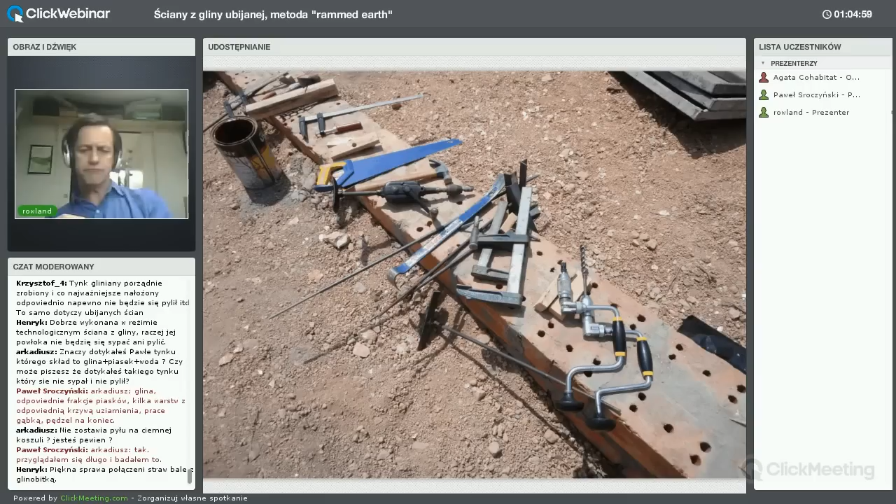Now this is the other extreme, where all of the tools are without electricity and all of the material is dug by hand, and the formwork is made up from planks of wood that we've bought locally.

So this is just a very quick section to show you how a series of boards can be put together. Sorry, it loads a little slowly - I thought this would go a bit quicker.

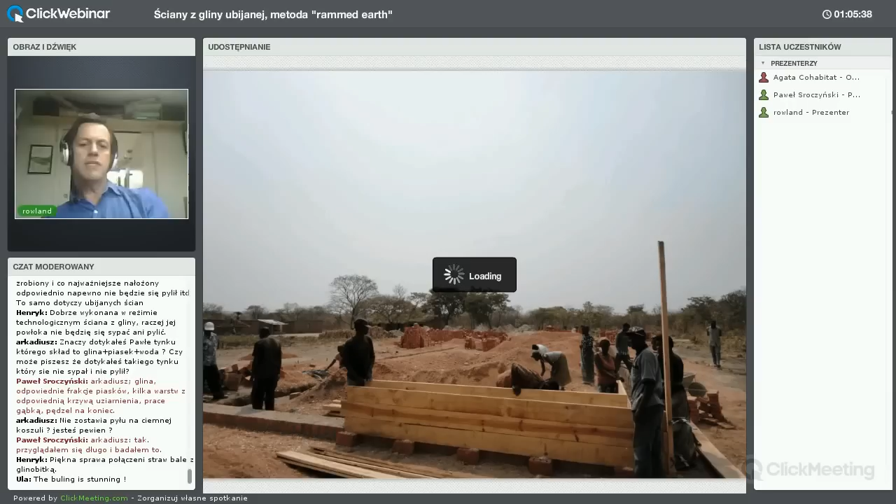These are being assembled, end stops. Now all of the material is being placed and rammed by hand. Once we're up to the first level, more boards are placed in, and the next level is rammed.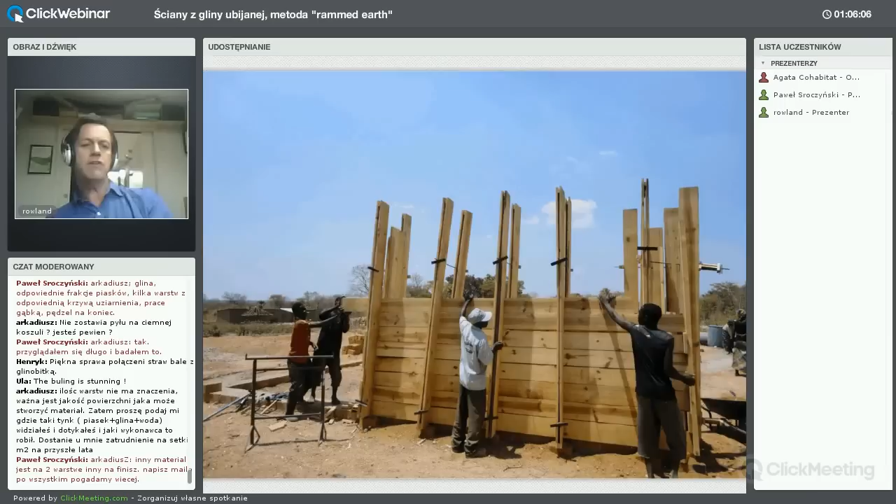You can see here that the bolts that go through - there's a series of bolts at the bottom of the wall, and a series at the top - so there are actually only holes through the wall at that bottom level, and those are quickly filled with the same material we're ramming the walls with.

And the next level, then of course you have to think about access for the material. The next level, next lot of access, and there is the wall. That was the first wall that they built.

It was a group of 16 young people that we trained. This was their first wall, and it took a day and a half to build. So it can be quite quick, even working by hand, if you are organized and manage your workforce cleverly.

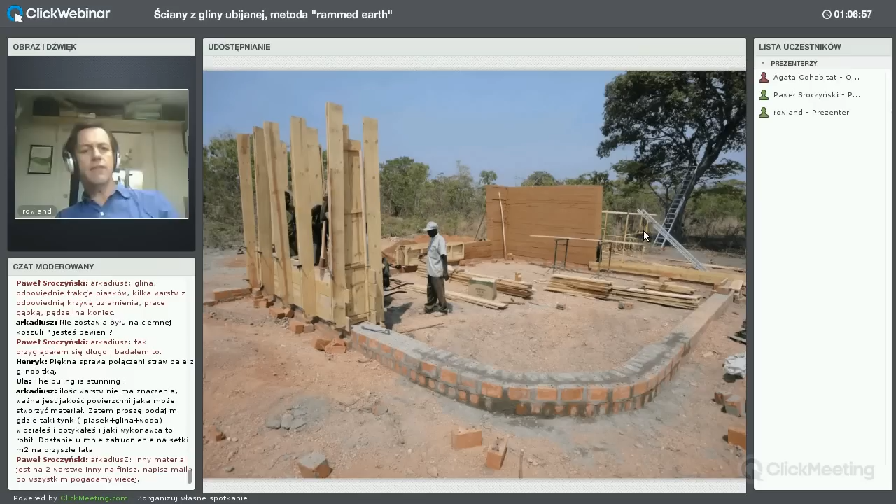So you've got that first piece of wall on the right-hand side, and on the left-hand side, we have the bottom of the same set of formwork set up ready. As soon as they've finished their first assembly, they can move to their second. There's no waiting, so you're managing the workforce effectively.

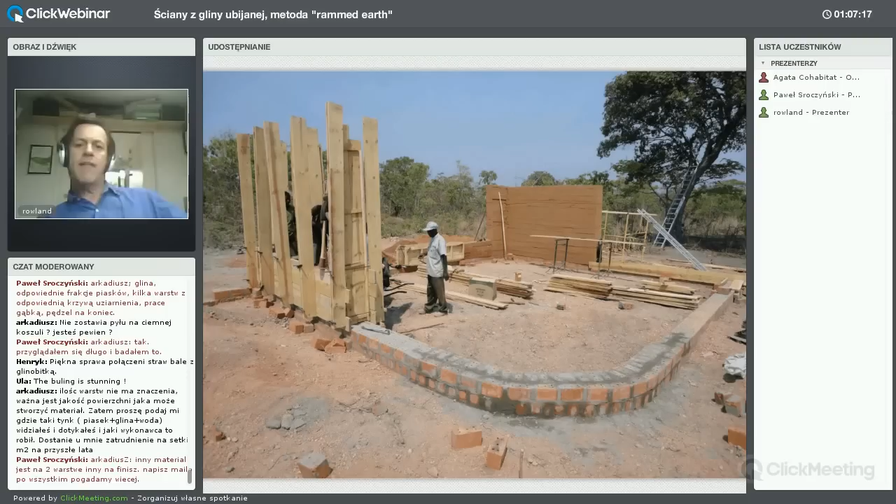You've then taken down the first lot of formwork you saw in the first images, and that's making a third assembly, which you can see on the extreme right-hand side. It's the same corner setup as the first corner, so you've got one full setup and one starter setup, which means you can keep the team working rapidly.

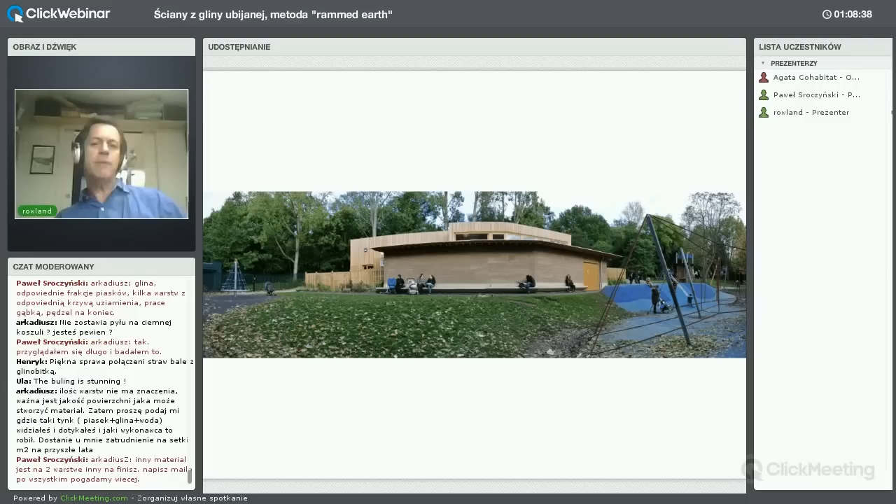Coming to the end now, this is a project we did a couple of years ago in Holland Park, very central London. This is unusual in that all of the material was brought to site. The client is a public park, and they said you can't dig material on site. When we arrived, we found they were actually removing about 100 tons of soil from the site, but we couldn't use it - it was too late. These are some of the frustrations of the work: opportunities are there if people can understand what they are, but they don't always, and it's difficult to explain to them.

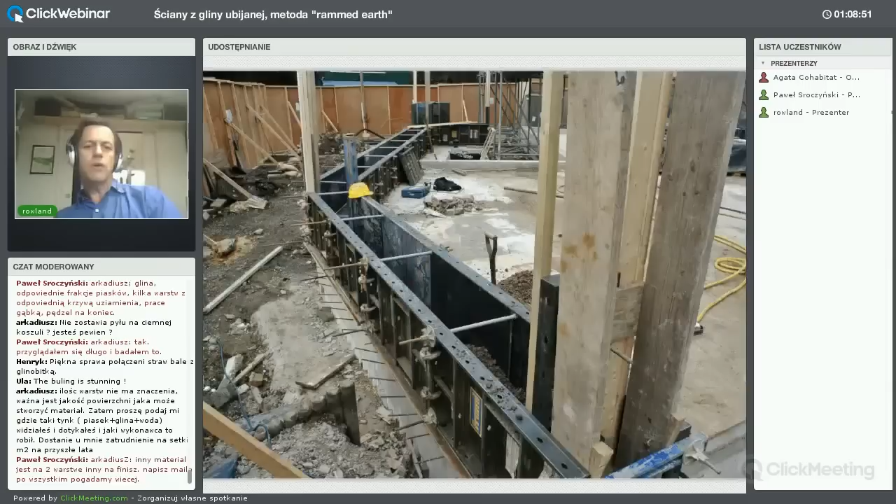So inside the building, it's a kitchen and a series of toilets and bathrooms. This is our initial setup, done in the snow in March, and this is the building as it's being built with waterproof covers over the walls as we extend them.

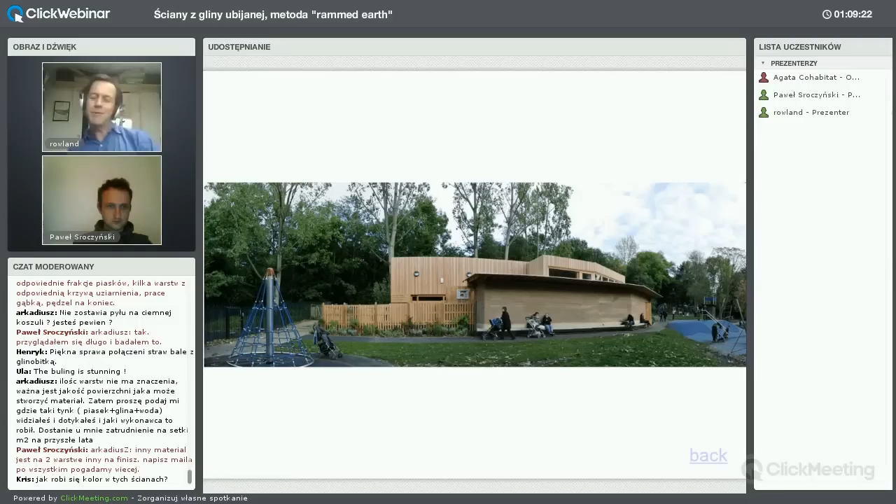And that is it. So I hope that's been interesting. For me, it's quite strange speaking to people that I can't see, but I hope that you have a sense of it. If there are questions, I'm happy to answer them.

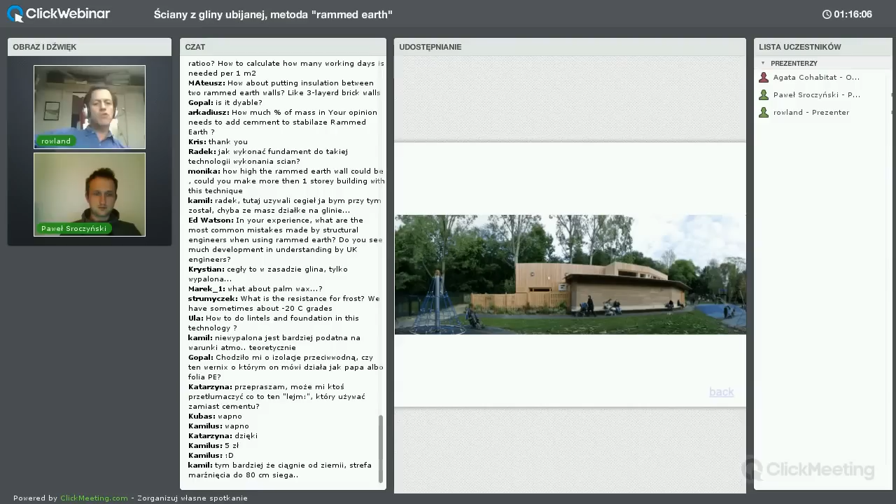I'm going to assume this is a Polish question and that you have strong minus temperatures, below zero, and therefore I'd say if you do a basement, it's probably better to do it in brick or stone. You can do a basement, and you can use lime to keep the strength of the rammed earth higher when it's wet, but this freeze-thaw issue is something we don't know enough about. There's more research to be done.

Could you tell us more about the possibility of putting some installations inside these kinds of walls? Fixings, yeah, fixings. So you can fix fixings, but also pipes, water pipes, electricity, and stuff, all services as well.

In Africa, all fixings are built in as we go. In the UK it's a bit of a mixed story. Sometimes we're building fixings as we go, so that might be timber elements tied into the wall, giving you something to fix shelves or whatever to, or it may be roof elements. But people here also drill after they've built and use epoxy resins and other kinds of fixings into the wall. It's the way the industry is structured here: I'm the wall person, I do walls, the next person is the roof person, he does roofs, and the next person is the plumber, he does plumbing. We're not the same people, and they like to keep things separate, but it doesn't really matter. All of them work.

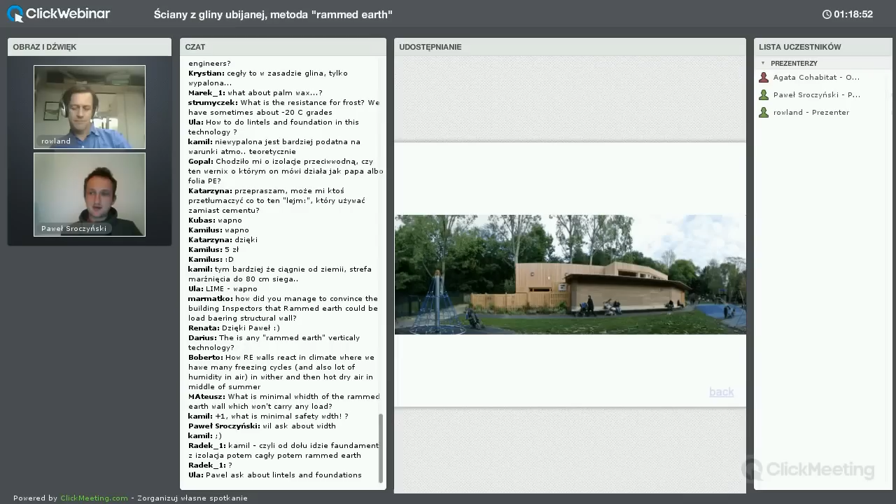In the UK, we have an expert-driven industry, which means as long as you have an engineer who generates a design and submits it to the local building regulator, they're happy. But it does lead to walls sometimes being over-engineered because the engineer is looking to his own insurance, which guarantees his or her work. Once you pass that hurdle, the local authority doesn't mind. This is what we're working towards with standards and norms, to reach a situation where you can just give the calculation to the local regulator, and they have a standard they can follow and say, yes, it's 300 millimeters thick, single story, taking this roof load, fine. That's the situation I'd like to get to, but it takes time.

Could you tell us a bit more about the lintels over windows, how do you construct them? Just like you construct any lintel, it could be timber, concrete, steel. I'm happiest using timber, it just seems like a more natural fit, but we've used everything, including old telegraph poles. There's different ways of forming openings and fitting windows. You might build a window in as a complete piece, or, like the example I showed, the walls are left with a little return on them, and the lintel is placed on, then more formwork is put on to connect the two sides of the window. There's different ways of doing it, doesn't really matter. The main thing is that the lintel must be able to support the load.

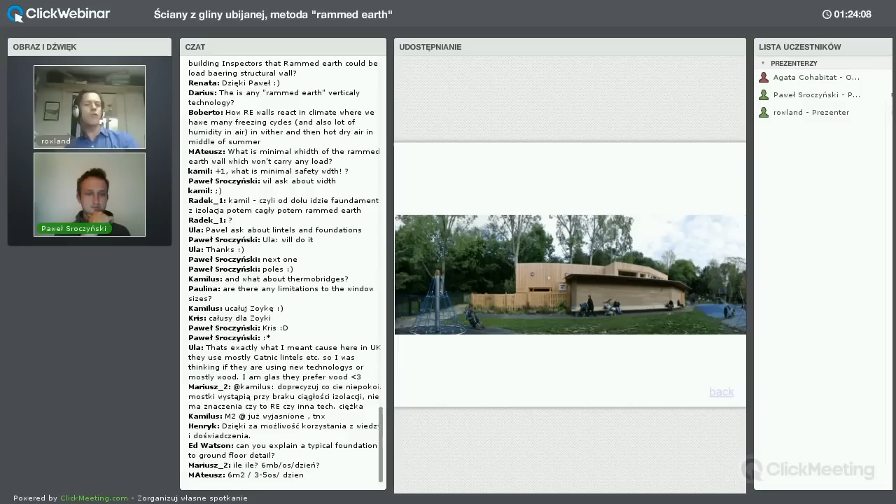If it's a manual team, we'd normally think of it as being 3 to 5 people, and again we think about 6 square meters a day. So if you've got a program that says you have to complete the work within a month or 6 weeks or whatever, then you'll have to have 2 teams working, both doing 6 square meters a day, or 4 teams, or 8 teams. It's just a question of fitting the work rate to the program you are obliged to.

Okay, thanks, this would be the last question in this session. Could you tell us about the minimal width of the wall in relationship to the height?

Our minimum is 300 millimeters. You can do smaller, but one way and another, it becomes more awkward to work with. So 300 millimeters is our minimum, and you can go from there.

We've done 2-story work at 300 millimeters, but normally the wall begins to get thicker as the wall gets higher. So it might be 350 or 400 millimeters on the ground floor, and 300 on the first floor, or 450 on the ground floor, 400 on the first floor, 300 on the second, or 500 on the ground floor, 450 on the second, 400 on the third, 300 on the fourth floor. Do you see what I'm saying? So it's getting thinner each time.

The lecture theatre which I showed is a little over 7 meters high, so it's sort of 3 stories, and that was 500 all the way up because there was no change in thickness, so they wanted it to go up evenly. It's carrying a lot more load than it really needs to, its own weight. But in a normal situation where you're going up floor by floor, the walls would be getting thinner.